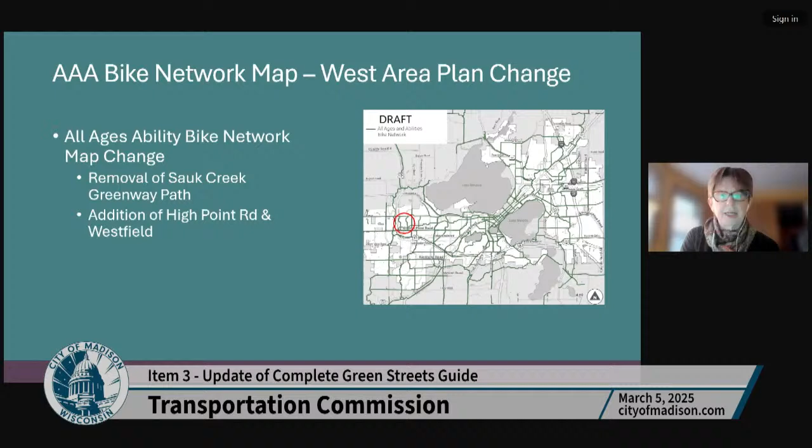We updated the map that's in the guide just to reflect the changes made with the West Area Plan. We have started a project now to finalize this map, so this will be a bigger final map coming in the future. But for now, I just updated it based on what was already approved at council.

One thing we noted as staff was that for our selection of bike facilities, we thought it would be useful to add buffered, if possible, to the bike lane, since that tends to be our preferred option when space is available. That was a suggestion that came out of our work as well.

Also on street types, we just updated those maps based on the West Area Plan and Northeast Area Plan. They did make some changes and you can see those highlighted in yellow. I felt like for now the guide should have the latest ones in there to show that that is changing over time.

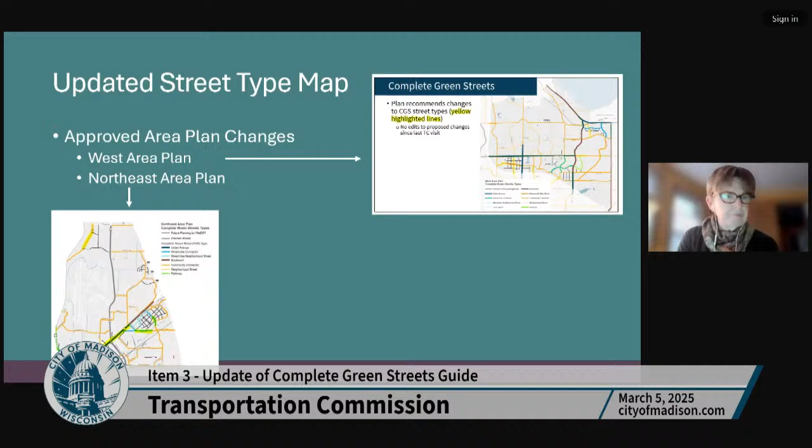Another thing that came out of the walkway discussion, initially we were talking about changing that to walk zone to be a little more clear, since with most of our street types people are kind of confused, because we show a walk zone, say on a neighborhood street, at being 6 feet. But that's because it's 5 feet for the sidewalk and a 1 foot buffer that we like to generally have off the property line when possible. So in our fall meetings, the suggestion was made to call that the walk zone.

And then to just call them all zones, so instead of calling it the travel way, to call it the travel way zone. I realized after we did that, we probably could just call it the travel zone, but in this you'll see I left it all at travel way zone. And then flex zone, that's always what it's been called.

So then we just had some things related to cleanup of the details. Engineers were asking how more precisely things would be measured, so you can see that for the travel way zone width, that's edge of pavement to edge of pavement.

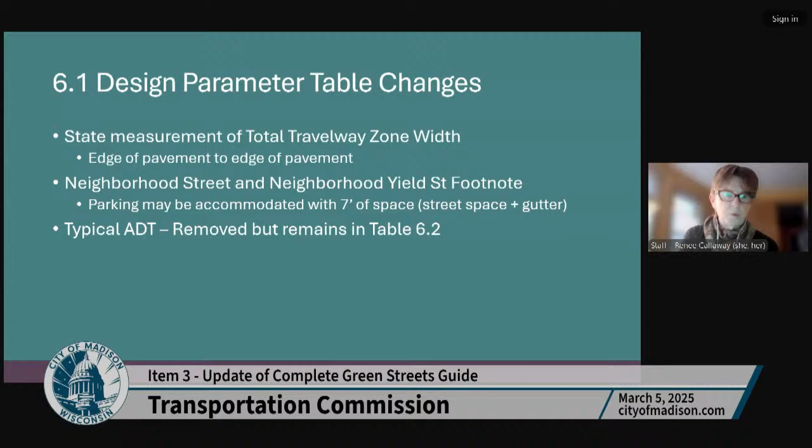And here you can kind of see in red a couple of those changes. It's kind of hard to see the red on the orange, but just making some minor changes, as I mentioned.

In section 6.2, we keep the average daily traffic, the ADT, but staff felt like calling it estimated instead of typical was just a little bit more flexible in how you might think about a street. So that change was made.

Added a footnote on neighborhood yield streets. We've come across some situations we didn't think a lot about. First, it's kind of popular to build streets that have very few or even no driveways, with all driveways off an alley. A yield street works well because there's a driveway where you can pull over and yield to another car. So we wanted some language about creating pullover zones on the street through some no-parking areas to fit the needs of the particular street. That's a new footnote.

Fire was comfortable with that as well. But if we have a street with no driveways, there is no actual yield-in location, like our typical older neighborhood streets. And we also have a situation where we're trying to build a neighborhood yield street, but it has no or very low parking utilization, though we don't necessarily want to remove all the parking. So we wanted to include that in those situations there would need to be design elements that reinforce that. That could be bump-outs or a variety of things, but we would need to create that yielding condition in those situations.

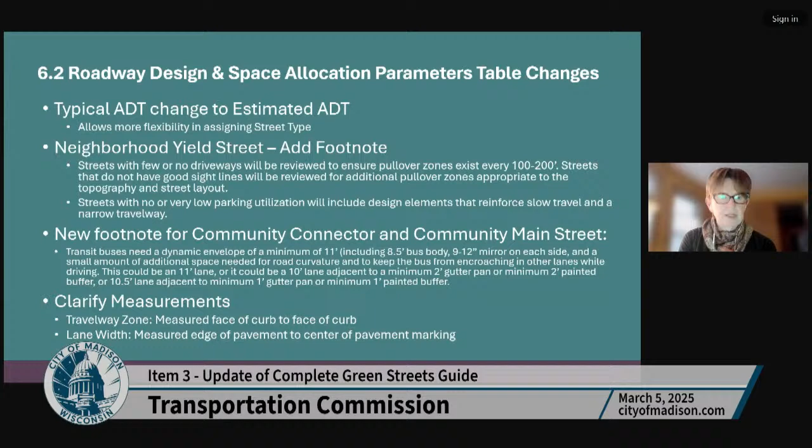And then just a couple more changes in 6.2, clarifying how we would measure things. It's kind of a little detail, but this guide is very important to staff, so these little details really matter to them. So just clarifying a couple more of those. And here's that chart with the additions in it.

This is a new section. For those of you who've been here longer, you may remember our first project that came through development. They were looking at building a neighborhood street, but they had taller buildings, so they came and asked for a variance. We talked about this, and then again in September, about what are some ways they can meet the guide requirements of keeping streets narrower.

I think the confusion here, and maybe we need to change the title of this section, is that this is really about neighborhood streets and mixed-use neighborhood streets, the ones that typically are lower volume and have a shared space for motor vehicles and bicycles. The question is how you can meet the fire requirements for larger apparatus while still keeping the narrow travel way we have in the guide. So that was definitely a bit of a conflict.

So Chris Petykowski, along with the staff team, came up with a variety of creative ways you could keep a narrow street and still meet the fire requirements for situations where it needs to be in the public right of way, where they don't have the construction methods, or maybe there isn't the ability to meet the goals of the development on the property for the fire lane. So this is some of the pictures.

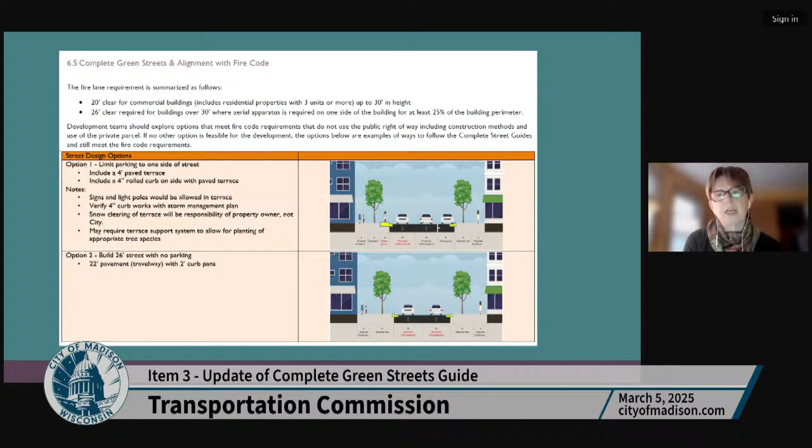So these were the options that we had come up with and brought to you for discussion, and we would like to incorporate this into the guide.

The one change I want to talk about today came up as staff discussed this a little more, on option 5. We had shown a typical 6-foot walkway zone, but realized that if a car is backing in, we'd want a wider space because that bumper is going to take up some of the walk zone space. So that's the one change - we'd want a slightly wider sidewalk in that situation.

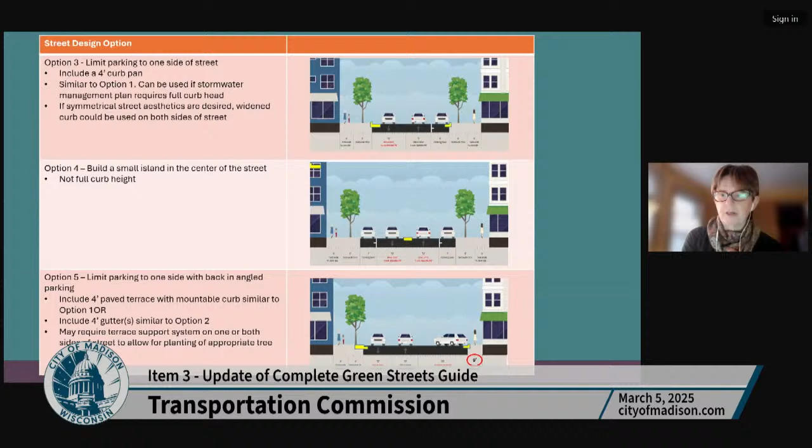And then Anne caught something, and this is a new slide from what you got. In the implementation section on item 4, there's still a mention of forwarding things to the Transportation Policy and Planning Board. Anne came up with a few suggestions, and I decided that I think it would be best just to completely eliminate it. It doesn't need to stay in that section as a historical item.

And then I noticed that we had talked about making a switch to the Parkway speed limit. It was originally listed as 25 to 35. We discussed changing it to 25 to 30, which I did change, but only in one of two spots. So I wanted to make sure that we clarified if we wanted to make that change this evening or leave it as it was.

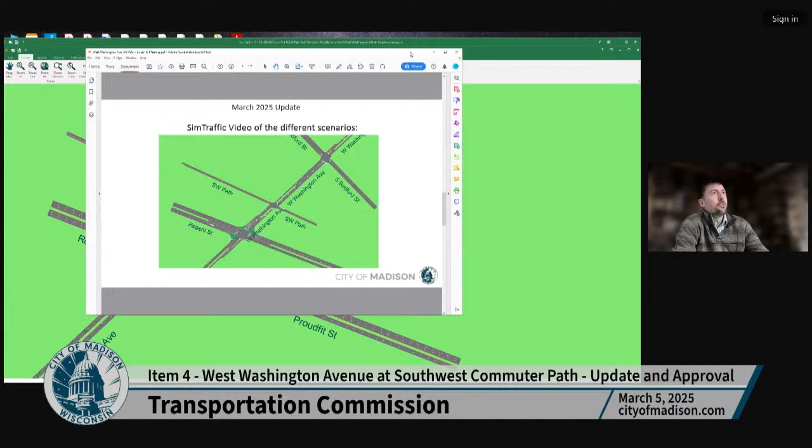So now I'm going to attempt to show this to you in SimTraffic. This is the 4-lane configuration, with the additional traffic from John Nolen Drive. This is normal speed - you can see inbound is pretty much full. It backs up kind of to the Regent Street intersection. And this is kind of with the even split here, even green time between West Wash and the path.

We would operate this as a single stage for the path. And I can speed this up. So there's not a lot to comment on here - it operates pretty good, pretty acceptable. I mean, the volumes here are still, I think, below what they were pre-COVID, so we kind of know what this looks like.

Oh, one other thing I want to mention is that we did look at the video from last summer of how this operates without the signal right now. And right now, without the signal during the afternoon, it's kind of an even split. So roughly West Washington Avenue traffic will go for about 10-ish seconds, and then they'll have to stop for about 10 seconds, and that just continues forward. That was just based off the path volume now and how that operates, with basically zero delay on the path - as users get up, they hit the button, they go straight through.

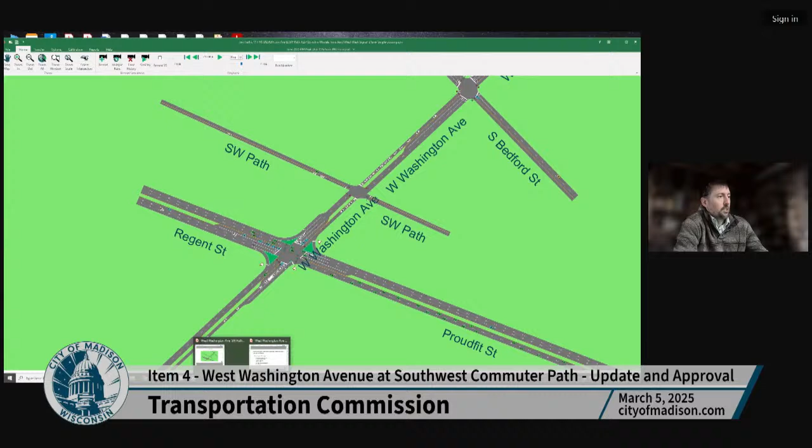So yeah, that's that. If I go back to the presentation - oops, I'm sorry, this is the wrong one.

So looking at the pros and cons of each, with the 4 lanes, there's going to be less delay for path users since they won't have to wait for that long green time on West Washington Avenue, but that's kind of just during the peak hour, during the busy times of West Washington Avenue when we need to add that green time.

We wouldn't have the curb changes, and that would require storm sewer changes, kind of a bigger construction project. The cons are it's a longer path crossing. We need to provide more time for pedestrians to make that longer route across all 4 lanes. And there's still some of that safety factor that we talked about in detail in the last meeting with the dual threat. Although, if everyone is following the traffic signals, that shouldn't happen, but we know that doesn't always happen.

With the 2 lanes, maximizes safety, which I just mentioned, a shorter path crossing so we can reduce that green time required for the path by a little bit, not a lot. Just an overall reduction of crashes.

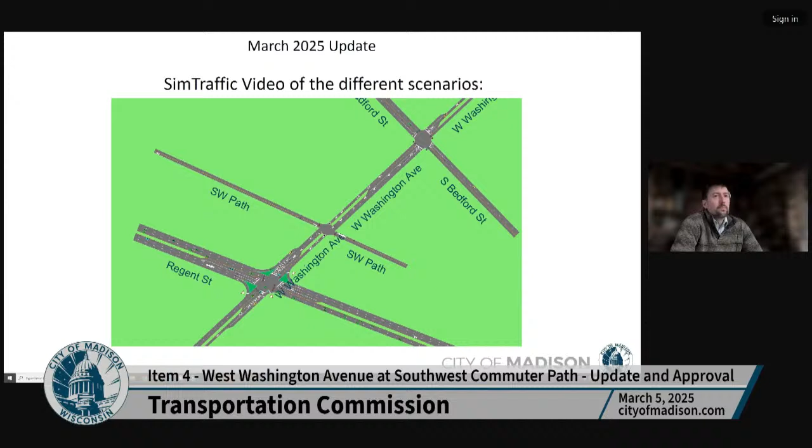Okay, thanks, Chris. I also support your recommendation and want to commend you for the excellent work. I know it's been a lot of work, a very thoughtful plan, although it does require additional OCR approval. But it definitely appears to comply with the OCR order and address the safety and other concerns expressed both by the public and by the Transportation Commission. So I know there was a lot of balancing that went into this, and I really commend you on this solution. So, other comments or questions?

Okay, we would need a motion to approve staff's recommendations. Bill? Thanks, Dan. I'll make a motion for adoption of all of the recommendations presented this evening by the staff. Okay, there's a motion for adoption of all of staff's recommendations. Chris? Second. Bill, did you wish to speak to your motion?

Yeah, I think this is a good solution. I think this is what we heard a lot of interest by path users, that this will improve their ability to get across the street safer, especially when we can reduce it to two or keep it at 2 lanes in each direction. And I agree with Tom. I hadn't thought about which lanes we close, but I agree that closing the outside eventually is the best way to go. So yeah, I think it'll be a good solution.

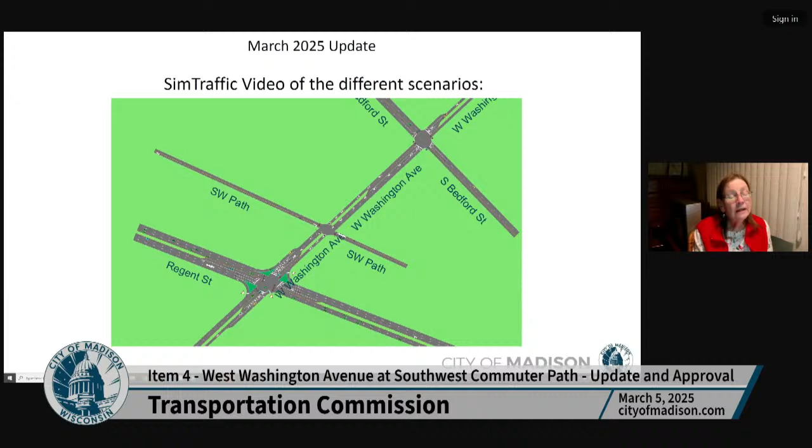Great, thanks, Bill. Okay, we have a motion and a second to adopt all of staff's recommendations. Is there any discussion? Okay, seeing no hands, I'm going to assume a unanimous consent vote in favor, unless anybody wishes to vote no or abstain. If so, please raise your hand. Okay, seeing no hands, the motion is carried.

And again, thanks, Tom and everybody, for all of the hard work on this. I know there's been a lot of effort put into it. Yep. Thank you. All right, thanks.

Okay, next we have Transportation Improvement Program, proposed projects and programs. Chris. Hey, everybody. Chris Petikowski with City Engineering, and I am going to be presenting on our proposed draft Transportation Improvement Program, commonly known as the TIP. And I am going to share my screen here.

All right, is everybody seeing that? Yes. Yeah, okay, great.

I think many of you have seen a version of this presentation before. Each year we update our transportation improvement program, which is basically a listing of all our proposed projects. It ultimately helps inform our budget request that we'll submit to the mayor in April, and then as it works through the budget approval process, it finally gets approved in our budget in November. So we're just starting that process here.

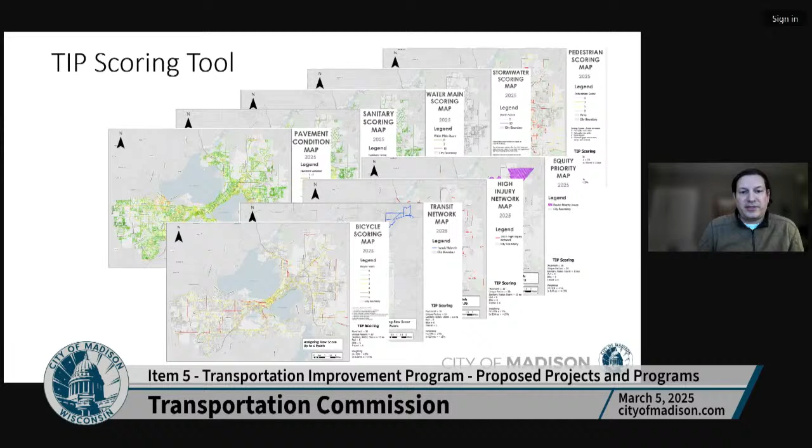First off, the scoring tool - as Jose mentioned, we've developed a scoring tool to help prioritize our projects, based on 9 different layers. I won't go into great detail since he covered that two weeks ago. But you take all those layers together, put them into a GIS database, and now we have a map throughout the city with each street segment scored. It's been very helpful for prioritizing the projects in our TIP.

This year compared to last year, we have to add 2031. Last year we did 2025 to 2030, this year is 2026 to 2031. So when I look to add projects and see where there are gaps, we use that tool heavily to help pick the projects.

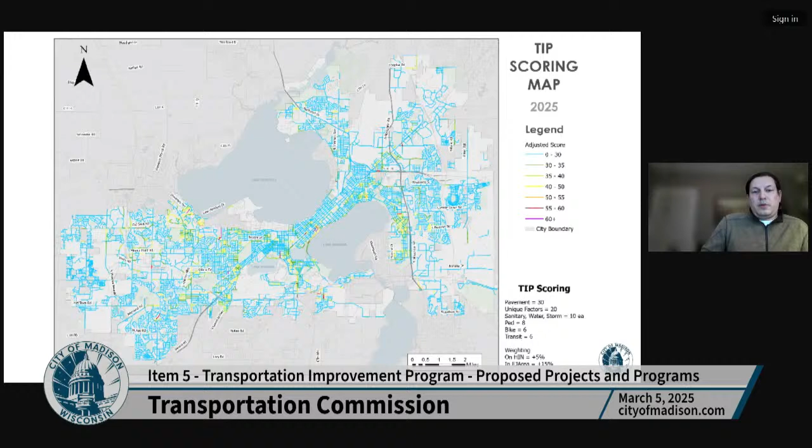So I'll jump right into the programs. Reconstruct Streets program - for next year, we have about 6 or 7 projects proposed here.

This is kind of a tentative list. I'm still coordinating a lot with our storm, sanitary, and water folks, because when you reconstruct a street, you're going to reconstruct it entirely. We'll get rid of all the base, all the pavement, all the curb and gutter. We'll almost always do the sanitary sewer and storm sewer, and in most cases try to do the water main as well. So we have to coordinate with each other's agencies and try to pick the right projects, but sometimes one project may be very heavy on storm.

Maybe 2 or 3 of them are really heavy on storm, and their utility can only handle a couple of those a year. So we have to coordinate, and sometimes they have needs that are urgent that we have to take care of too.

So I'll be coordinating with them over the next month until we submit our combined request to the mayor for budget. Right now we're looking at MacArthur, Larson, Sycamore, Birge, Evergreen, Center, Norman, Wood, Lakeview, Sherman, and Hawthorne.

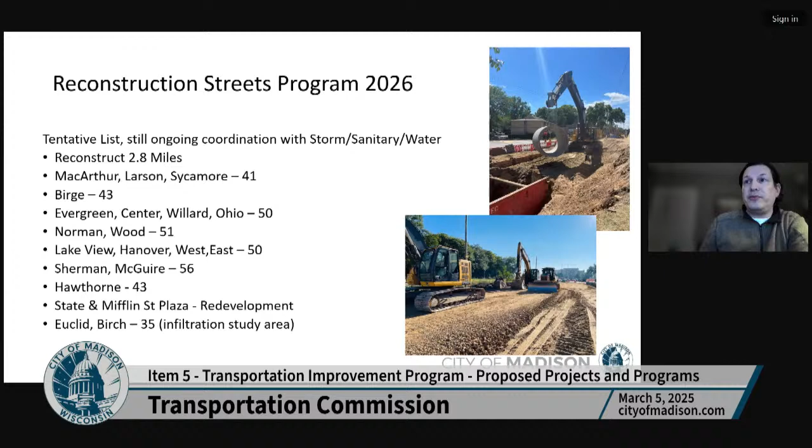So those are the reconstruct streets - the full, replace everything projects. They're very expensive. We can only get to sometimes 3 to 4 miles a year.

The next program is a resurfacing program where we can really get a lot of bang for our buck on numbers of miles of streets. Typically we look to chip seal about 50 to 70 miles of street a year, which has been very successful for us. Crack sealing another 50 to 100 miles. We do a lot of patching, so if there's just one area that's got a lot of potholes, we'll do maybe a 30-foot patch.

You guys will probably notice over the winter there's some squares of pavement that are kind of wavy. A lot of times that's a water main repair - they go put some temporary pavement in, and then we come back and patch it later that summer. So we do all of those water main repairs in this program.

We're also looking at a few standalone resurface projects: Milwaukee Street near the Starkweather Platte project, Midvale Boulevard, and Lake/Dayton, which also has to do with that State Street campus garage development.

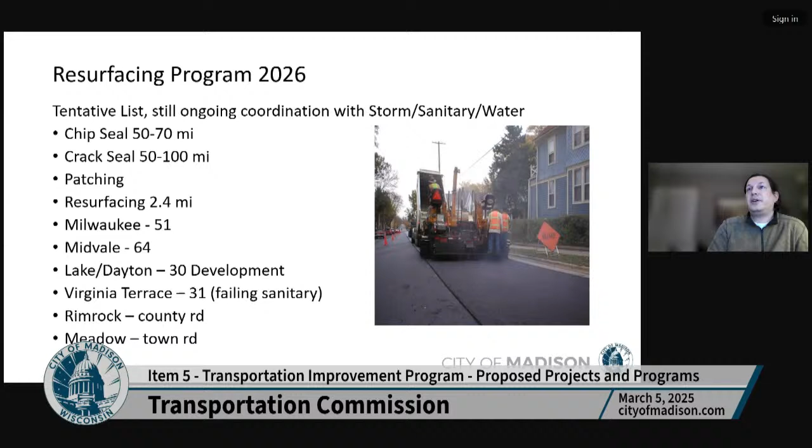So that's the resurfacing program. Again, with that chip sealing, we really try to stretch that out and cover a lot of streets. It can be kind of a pain for a couple days while that chip sealing happens, but it really prolongs the life of our pavement and stops projects from getting into the reconstruct program so quickly.

As I mentioned, I didn't do this as much last year, so we had about 2 years of projects in 2030 and 2031 to start populating. I used the tool to find all the highest scoring streets and look at those - projects I'm looking to add at the end of the TIP in 2030 and 2031. There's quite a few here: Badger, Orchard, Lewis, Wyoda, Camas, Baker.

Winnebago Atwood is an important one. Commercial Avenue, Parkside, Burr Oak, Ridgeway, and Felton. So those projects are all very high scoring - most of them have a lot of storm needs. These would be proposals to add to the end of the TIP in the reconstruct program.

Okay, moving to our bikeways program. This program allows us to help resurface paths. I failed to mention at the beginning, we rate our streets, half the city each year, and similarly our paths as well, using the PASER method on a scale of 1 to 10. For a street reconstruct, if a street gets down to a 3, it's in terrible condition and needs to get put on our list.

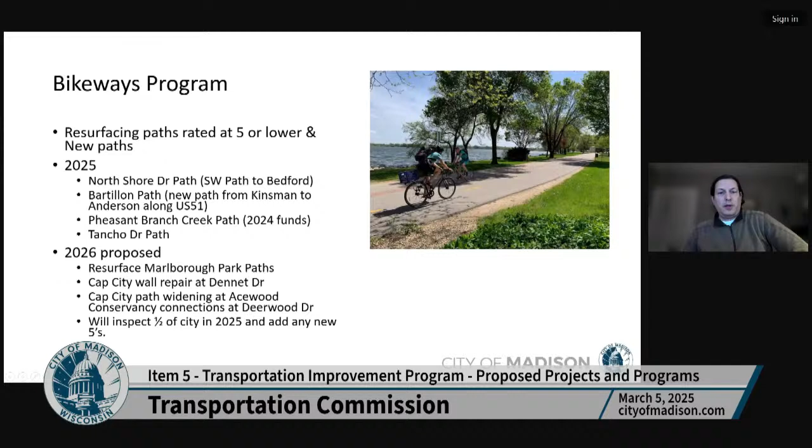Sidewalk program is a very successful program for us. We go around the city in 10 years and do replacements of sidewalk, doing 2 districts a year typically. This summer we have District 10 and 20 scheduled. In 2026, next year, Districts 2 and 6 will be scheduled, so we'll be starting to work on those.

In addition to the ordered sidewalks in those 2 districts, we also have citywide requests. Sometimes somebody will call in, maybe there's a trip hazard or some drainage problems with some sidewalk. We'll actually do a citywide repair contract that fixes some of those issues.

In the past few years, we've been really busy doing Metro bus pads for the redesign project. As the routes change and they need pads in different places, we install those with this program. We've been doing a lot of those in the past year and a half, and we'll be doing them this year. Hopefully we'll get closer to being finished, but I'm certain there'll be more in 2026 to do as well.

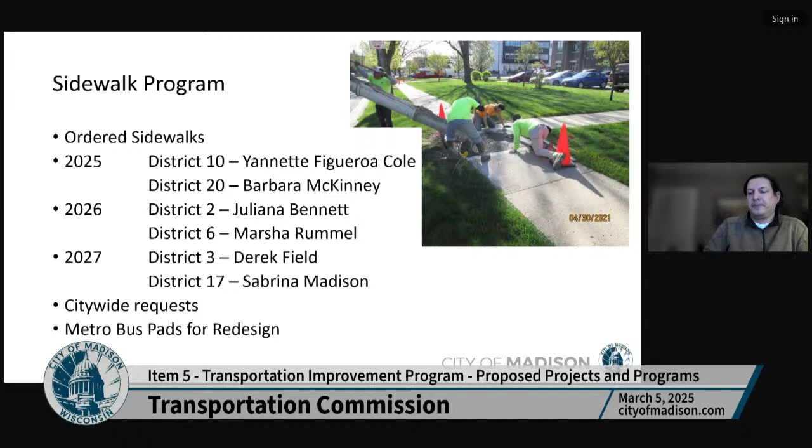And then we have our bridge repair program. This is really small repairs to bridges. There's not a ton of funds in this program, but it does help with keeping up our bridges in good standing.

In 2025, we're working a little bit on Knutson Bridge, painting those beams. We have some concrete spall repairs on the bridge over Park Street, a pedestrian bridge over Park Street, and a pedestrian bridge over Stoughton Road. And then we have some Campus Drive over Highland concrete repairs to do. So those will be happening this summer.

Next year, we're hoping we can get to some epoxy coating of the bridge decks that helps put a seal coat layer on the top that stops the water from penetrating into the bridges and lets them last longer. So proposing some work there in 2026 on epoxy coating, and these kind of come up as the year goes along. There might be a couple other things that we throw into the 2026 contract as we get through 2025 and may become aware of things.

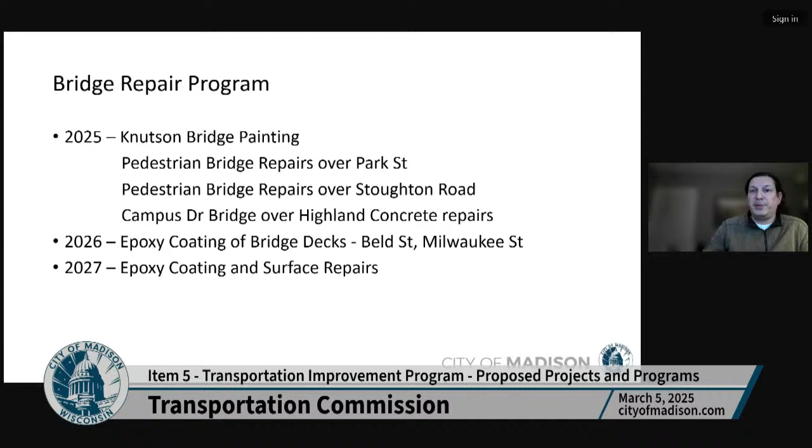Okay, now I'm jumping back out of the programs and into standalone projects that are standalone items in our budget. These usually have federal funding in them. John Nolen Drive is our biggie, so we're going to be reconstructing starting this fall, from Broome Street down to Lakeside.

It includes the 3 bridges over the causeway and adding 3 new ped bike bridges as part of that too, instead of having them kind of cantilevered off the street bridges. Excited to get that project started and completed. Those bridges are in poor condition.

We do have, later in the TIP, 2028 phase 2 and 2029 phase 3 planned, as Tom mentioned. So a lot of work in that corridor. Those are big expensive projects, and we're lucky to have the federal funding to go along with those.

I should mention too, on these 28 and 29 phases, you guys have already approved the geometry for the first phase, but we'll be coming to you folks with the preliminary designs for these later phases, hopefully later this year.

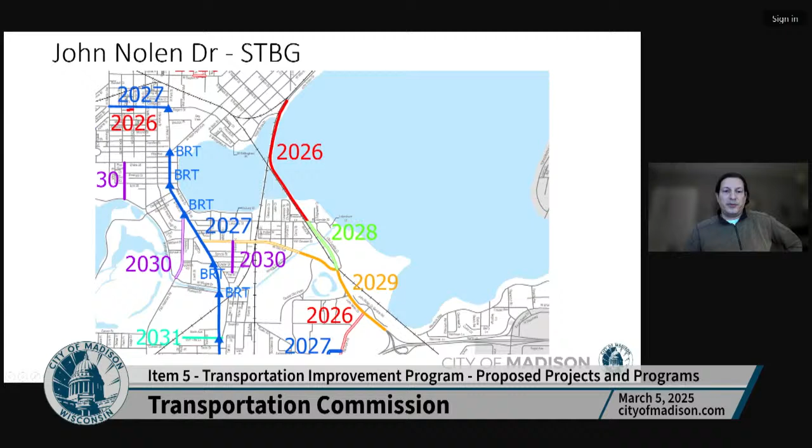Mineral Point Road is another federally funded project. I think I have this in 27... I'm just thinking in my head, it might be 26. It's 26 and 27. Okay, thank you, Andy. I knew you were on here.

This is a pavement replacement project from the Beltline to High Point Road. We're doing some safety improvements at the corner there. The bike lane was already built with the BRT project, but the pavement still needs to be done. There's also a very large storm sewer getting put under the road, and very deep, so that'll be a very complicated project coming up starting in 2026.

Also in the same area, we have the West Towne Path Phase 2. There's basically a missing link right now from Gammon Road to High Point Road. This summer we're building what we call Phase 2A, from High Point over to Zor Shrine. And then in 2028, we have funding to continue that path through to Gammon and complete that West Towne Path that we've been working on for years and years. So that'll be the last phase.

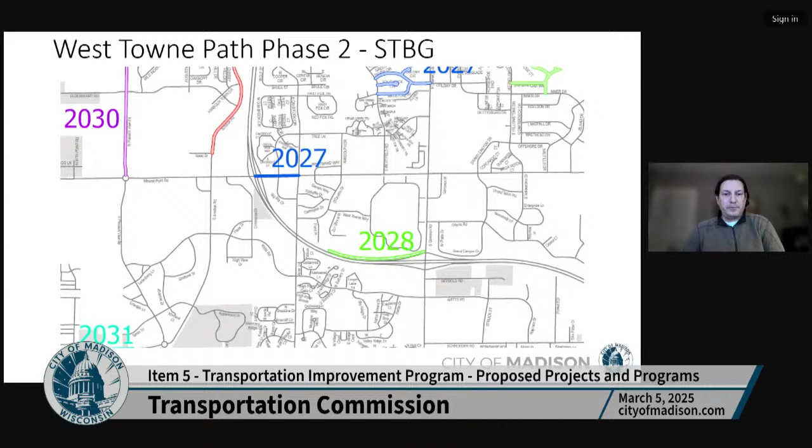High Point Road is a new project to receive federal funding, added last year. We are going to rebuild or extend the portion of High Point Road that is missing right now. There's a missing stretch between Midtown and Raymond, and we'll be constructing that starting in 2026, possibly lingering into 2027. At completion, High Point will be continuous throughout its length with no gaps anymore, which would be nice.

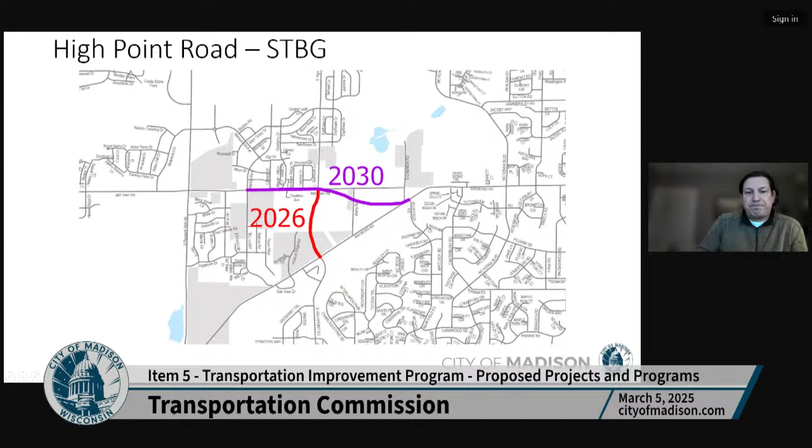Pleasant View Road is a future STBG application, so this one is not funded yet. This summer, I think in June, we'll be applying for the next round of STBG projects, which will be out in 2030 and 2031. So we are proposing to apply for this phase of Pleasant View Road.

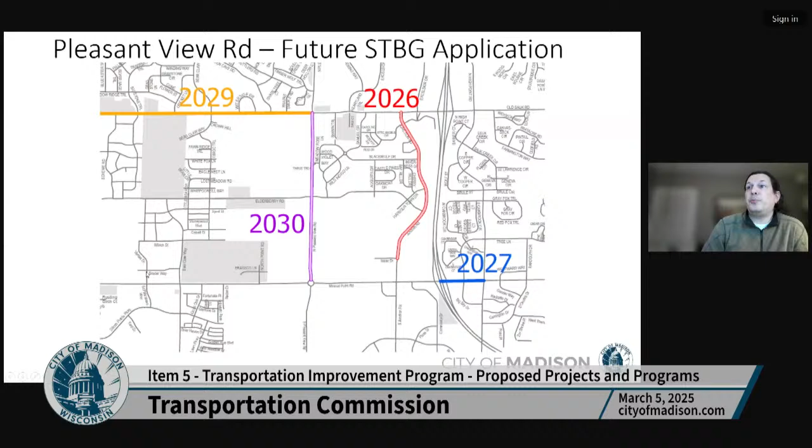We just completed the piece to the north. Andy just finished that project, or it's getting finished, mostly finished, from Old Sauk up to Highway 14 in Middleton, a joint project with Middleton. For the second phase, we've already approved the preliminary design and environmental document, but we still need to do the final plans and apply for federal funds for construction of this segment from Old Sauk down to Mineral Point. So proposing that in 2030.

Upgrading Portage Road to curb and gutter, sidewalk, a path, same with Hepker, kind of modernizing those roads and improving them. Our thought was to align that with the interchange project, which could be in the 2030s - that's kind of the best estimate we have right now. So again, this would be a proposed application this summer.

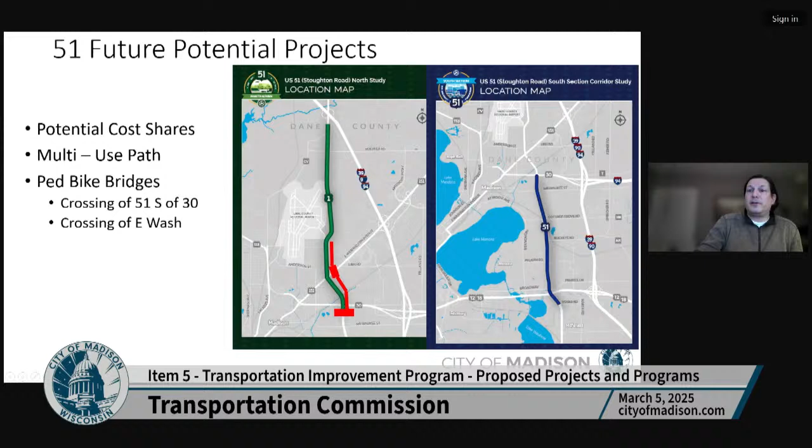There's two studies going on for Highway 51. There's a north study on the north side of the city, and then the south study. Basically the split point is like Highway 30. The one coming along a little sooner is the north study, and right now the current plan shows a ped bike path on the east side of the road and two new ped bike bridges, one over East Wash, one over 51 just south of 30. We don't know quite yet what cost share components WisDOT would ask us to participate with, but we do think there will be some, and as soon as we know that, we can try to update our budget requests. The north study is in the 2028 range for construction, and the south study is not in this TIP yet, as I understand it.

The next slide is I-39. WisDOT is also studying I-39 and improvements along there, and we also have some potential cost shares with those projects. I already mentioned the Hoepker Road interchange that we're starting to plan for, up here in the far northeast. The Milwaukee Street interchange is also shown as included, but that's not even until the 2040s at this point, their current thinking. So that won't show up in this TIP from 26 to 31, but it's stuff we have to think about for the future.

There are a number of ped bike bridges and underpasses proposed in that plan, in the AmFam area, East Washington area, Lien Road area, Milwaukee Street, and Cap City Path area.

One thing we've asked them to consider is putting temporary improvements on Milwaukee Street, because right now that bridge over I-39 has no sidewalk, and we'd like something temporary in place until construction gets to that area. The full reconstruction probably wouldn't happen until the 2040s, but we don't want to wait that long for the sidewalk issue. So we've asked for some kind of temporary improvement, hopefully in the Hoepker Road timeframe, like late 20s, early 30s.

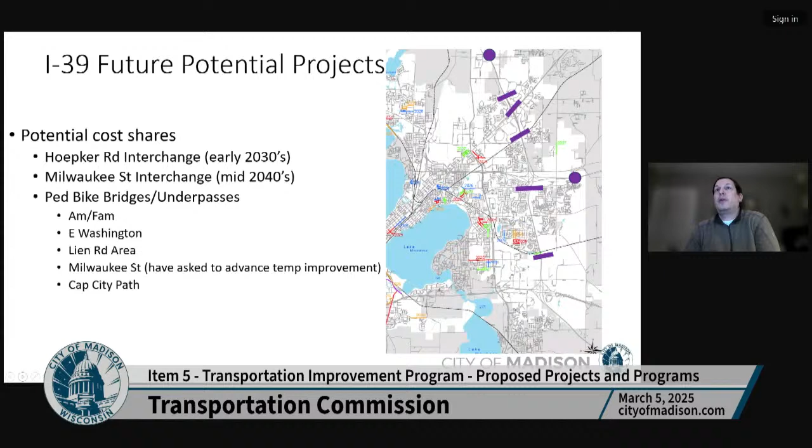Now I'll move over to our TAP program. The TAP program is federally funded, mostly for bike path kind of projects.

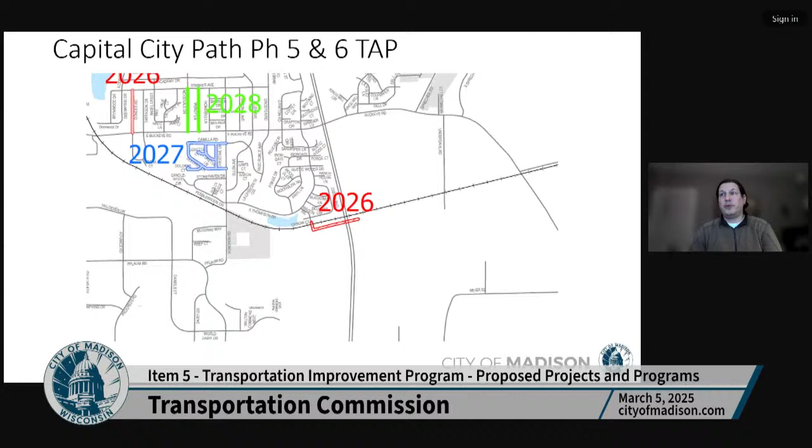The next one we have in the TIP is Cap City Path Phase 5 and 6, which extends it from Wagon Trail, crosses the railroad, and then also crosses underneath I-39. We're hoping to put that out for bids next summer, 2026. That one is approved and funded, and we're working on the plans at this time.

The next TAP project scheduled is in 2027, the East Rusk Path, getting you from Rusk over to Rimrock Road. We have a project getting bid this summer, a TAP project called Badger Rusk Path, building a path up Rusk Avenue. We'd like to extend that all the way to Rimrock Road, and as part of the Rimrock Road resurfacing project, there's going to be a new path on the west side of that road, making nice connections over to the Cap City Path on John Nolan.

So that's East Rusk. We also have Moreland Path scheduled in 2027 as well, extending from Raywood over to Wayland, also funded, and just starting the survey work for those projects. We also have Woodward Path, extending from just past Forester Drive down to Sheridan Drive, which will be a new path along Woodward Drive in 2028.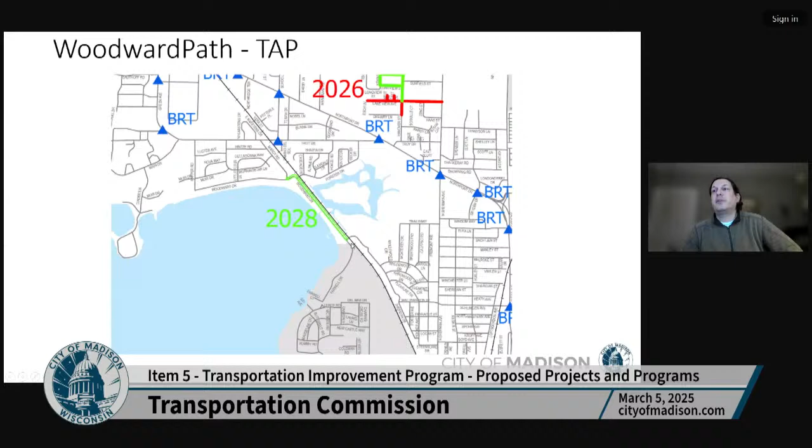And then we have a few proposed future applications that we're considering. The TAP projects should have a solicitation this fall.

Some of the projects we're looking to apply for include the West Beltline Highway Path, along the Arboretum area from Seminole Highway over to Landmark Trail, where they'd have a new path along that stretch. There are some missing sidewalk gaps, and what we'll do is tighten up the roadway and use some of that real estate space to build a path that both peds and bikes can use along that whole stretch. That's a future application. It actually got approved temporarily very shortly, then they realized we didn't have enough money to fund it, so it's back in the waiting room, so to speak. But I think it'll be a very good candidate to get approved as soon as the next solicitation goes out.

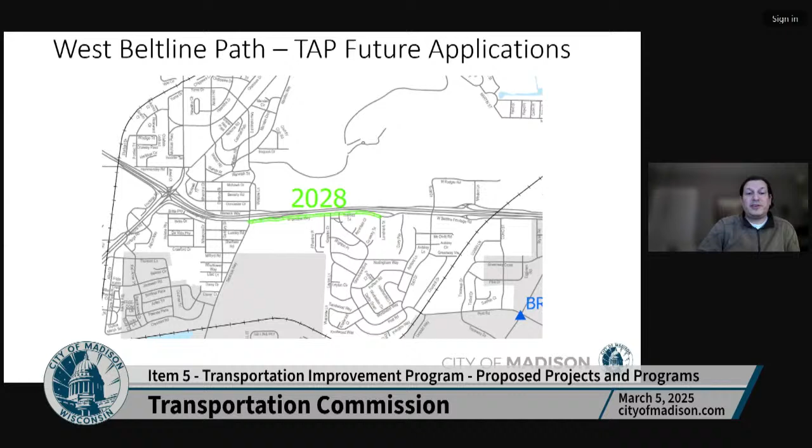There are a couple other paths near the Garver path and the Autumn Ridge path that would make some connections, and I think those could be future TAP applications. We built the Garver path up to Milwaukee Street, and developers are in charge of extending it a little further north. We'd like to make that final connection up to the current path that exists along Highway 30, so that might be one potential future application.

As I mentioned, the current 51 project includes a bridge over Stoughton Road. We'd like to extend that to connect with the new Autumn Ridge path and bridge connection we have at Ziegler Road. So those are also potential future application requests.

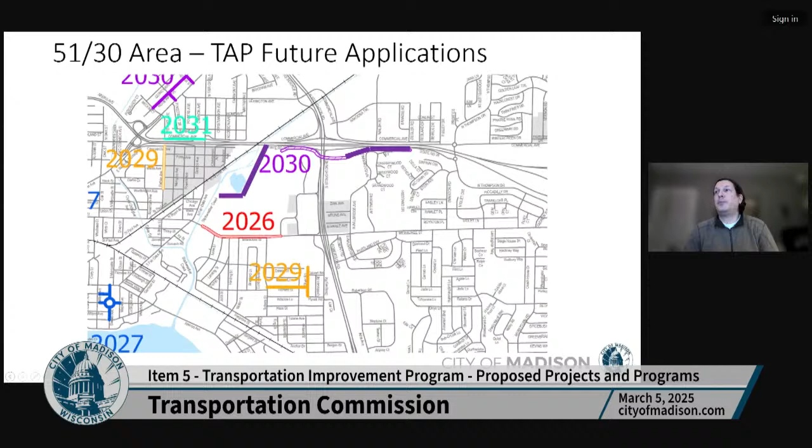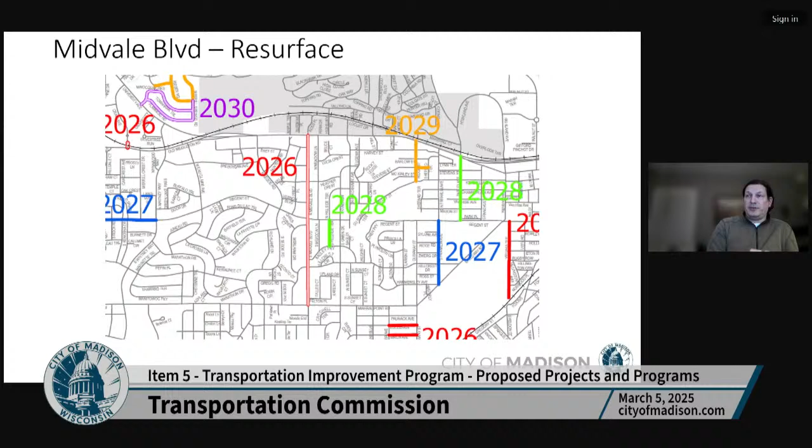All right, now we're into just city projects. Midvale Boulevard is a big project for us. We'd like to resurface it. It's kind of a tweener as far as a resurface and a reconstruct. There are some extremely large storm sewer needs here, and the stormwater utility is not likely to be able to afford them right away after all the significant investments we've been making. So what we're hoping to do is a resurface with this project, and maybe some restriping for safety improvements, just to get us by for another 10 to 15 years until we can complete the reconstruction. We actually proposed it for this year, but at the request of the neighborhood, with a lot of other ongoing projects, we pushed that off to 2026.

And then we have Regent Street, a very large project. This would be a reconstruct from Randall Avenue to Park Street. There's a failing storm sewer box culvert underneath Regent Street, and we need to get in there and replace that. So we're proposing to reconstruct that street, reconstruct the storm sewer box culvert, and then make some possible changes to the sidewalk, and maybe add a facility if we can make changes to the cross section there.

So Midvale and Regent Street are both city projects. We just don't have federal funds for those.

And then we have our Troy Drive Railroad Bridge that we continue to try to work with the railroad to fund. Hopeful that we can actually get the design started this year now, and there's a slight possibility of even starting construction this year, but most likely in 2026. That would rebuild the railroad bridge over Troy Drive, allowing for space for sidewalk on both sides of the street and bike lanes in the street.

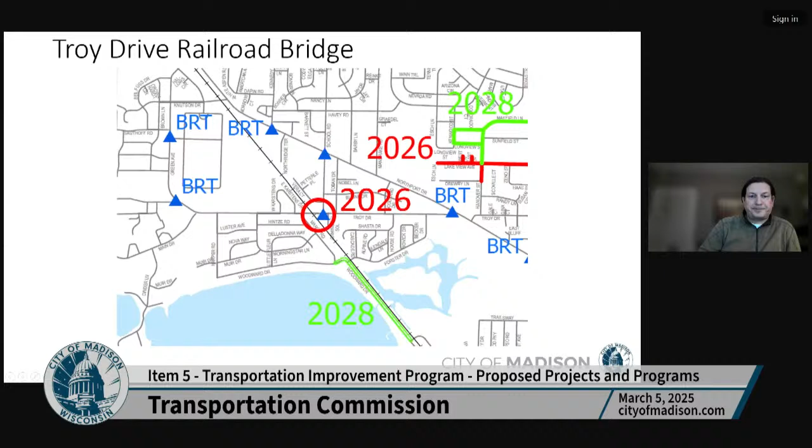All right, other city projects going on that we're coordinating with our partner agencies on - North-South BRT and Safe Streets, of course. Those are ongoing projects that we're coordinating as well. They're not actually in the city engineering's budget, but part of our overall TIP.

All right, last couple slides here. Just to give you an update on where we are with our street conditions. As I mentioned before, we rate our streets, half the streets each year, so every 2 years we get a full new data set, and we have goals to try to keep our streets in good condition. Right now we're doing very well on local streets. We would like 30% or less miles at or below condition 5, and we are down to 17, so we're doing pretty well there.

Our collector streets, our goal is to have 25% or less at condition 5, still doing well there. You can see too, we've also set newer goals. We really want to get everything that's a condition 3 - that's an awful street that we really need to get into the program - into the TIP so that there are no 3 streets. But of course, every year there's a new 3 street that pops up even after all the ones we do, so it's kind of an ongoing thing, but a goal to try to get at all of those.